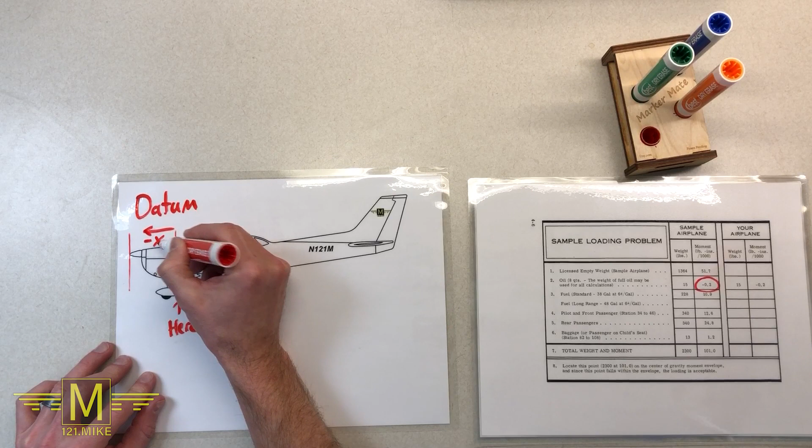But why is the 120 negative? Because that weight is in front of the point we're measuring from. As long as we're consistent where we measure from, we're fine. The distances and moments will all be given in your airplane manual, so it's not like you have to get out there with a tape measure and measure all the distances on your own.

Now we add up all the weights of 50, 10, and 90 to get 150 pounds. We divide 3,180 by 150 to get 21.2 inches, and that's where the center of all this stuff is concentrated. See, I told you it wasn't that hard.

Okay, now let's use some realistic numbers. Try to do this along with me, and hit pause if you need more time to run the numbers on your own before I show you the answer.

So we have an airplane empty weight of 1397, at 37.35 inches. We've got 35 gallons, at 6 pounds per gallon, and the fuel's at 47.8. The front seaters are 340 pounds total at 37.1. The back seat passengers are 340 pounds as well, located at 72.9. And we've got 13 pounds of luggage at 92.3.

Now our goal is to find out what the CG is and then determine if this was within the safe range. Here's a few things you'll notice in this example, though.

You see that the weights of the people are 340 pounds front and back. The FAA and commercial airlines assume that the average weight of a person is 170 pounds, which probably isn't true anymore. This airplane holds 4 people, so for this example we're just using the FAA average weight. You, of course, shouldn't do this for small planes because they are much more sensitive to differences in weights than the airliners are. You really must weigh everything you intend to put on the plane.

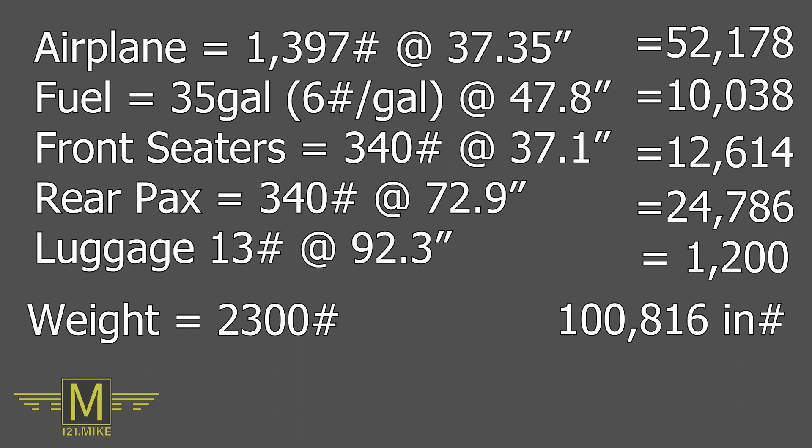So it's 100,816 over 2,300, and that gets us 43.8 inches. And at a weight of 2,300 pounds, the allowable CG range is 38.47 to 47.39. So we're okay. We're in the back half, but we're okay.

From a stability standpoint, it's always safer to be front heavy than tail heavy, though. But how do you know what the range is for a particular weight and such? Or are you saying, I'm more of a visual learner?

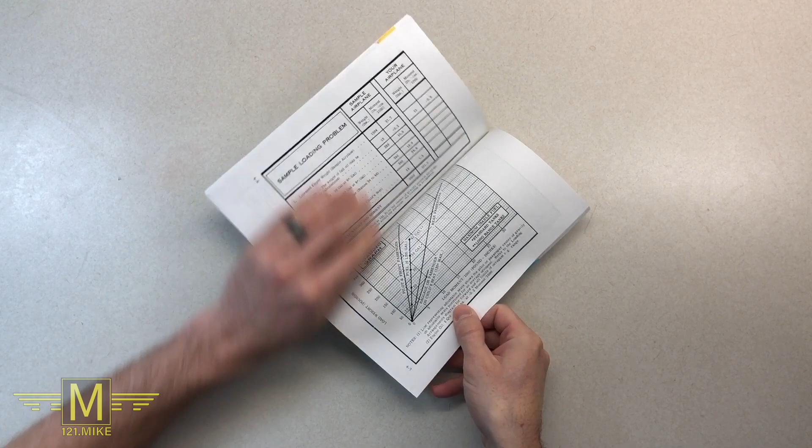Well, guess what? Inside your flight manual, you're going to find a performance section. It's going to include weight and balance. You'll see some charts that look like this, some tables maybe, charts that look like this. Let's show you how to actually use these things, shall we?

Okay, so when you load a plane, you're going to have some stuff up here, say the pilot and the front passenger. Up in the wings here, you're going to have some fuel, that's got a weight. Here you'll have rear passengers. You may have some baggage back here. And you may have to account for some oil and stuff up here. And then of course you've got the plane, I'll make that a double arrow because it's the heaviest load. So all these things have to balance. Well, that's what calculating the weight and balance will allow you to do.

So let me show you how you actually do that to figure out where in here your CG actually is.

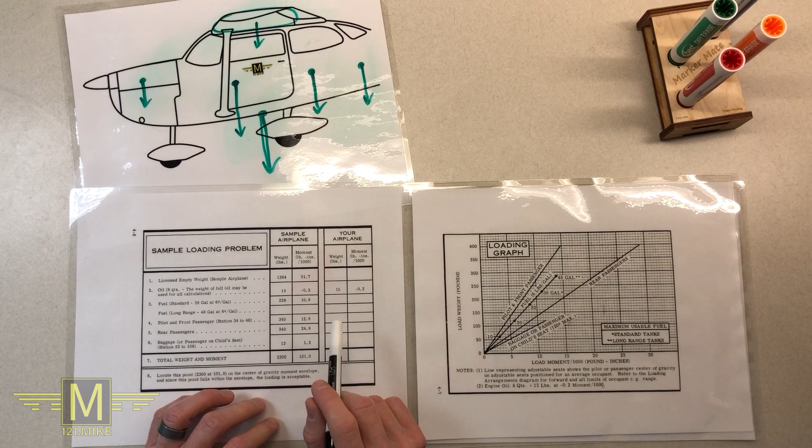So they've got a sample worked out here for you. This one is a little bit different than, say, you might find in a Piper. This one actually deals in moments. You don't calculate the moment, the graph will do that for you. Let me show you what I mean.

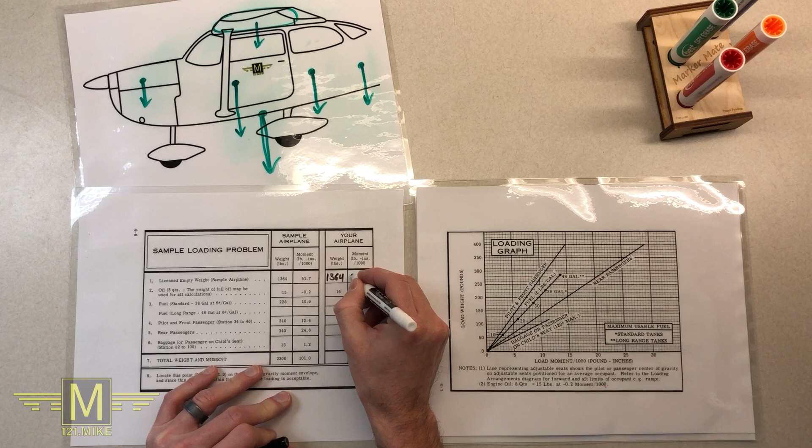So we're going to run through our weights and our moments here on this little table. Let me show you how to do this. The empty weight of the plane for this isn't going to change for the example. The empty weight is always going to be 1364, which means our moment's going to be 51.7. They've already done the oil for us because this chart doesn't have any way to do negative distances.

Fuel, standard fuel. We always want to take off with full tanks, like I mentioned, so that's still going to be 228 pounds at 10.9. Okay, we don't have any long-range tanks.

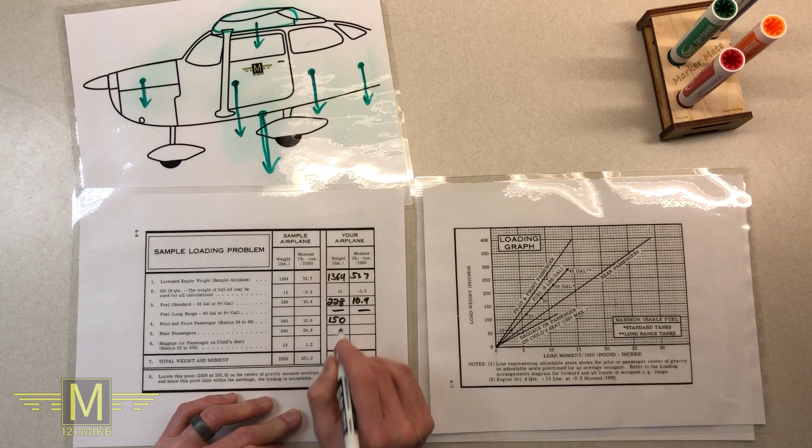Pilot and front passenger, this is going to be a little different. So let's say in the front seat we've only got a 150-pound person. Now we need to find his moment. We don't have the distances listed for us, so we're not going to calculate the moments. We're going to use this loading graph to find the moment. This is pretty simple. There's a different line for each of the positions on this plane.

For the pilot and front passenger position, it's this line here. For the fuel, it's this line. And you see the further back you go, the shallower the line gets. And this line is going to do the math for you.

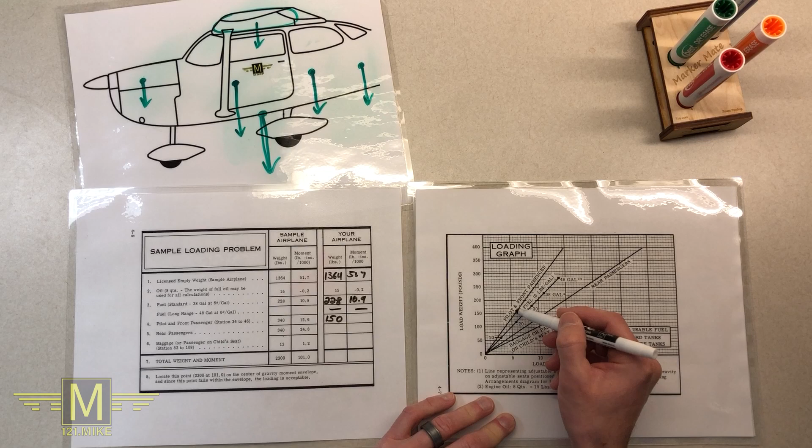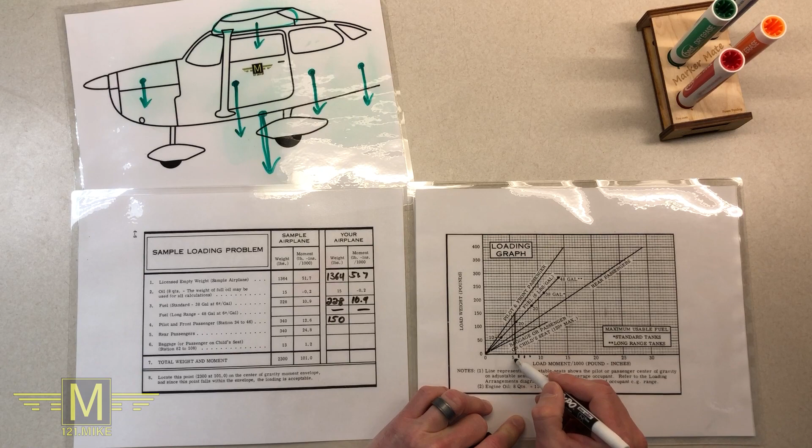So we're going to go up the front pilot and passenger line here, and when we intersect our load that we put at that spot of 150, we're going to come up, we're going to hit 150, and we're going to come down. We got to figure out what the scale is on this. There's a whole bunch of little hatch marks here. See? So these are in 0.5 increments. So that means our moment for this is 5.5, or 5,500 inch-pounds. But you can see here that this is in moments over 1,000, so we're just 5.5 to keep everything consistent.

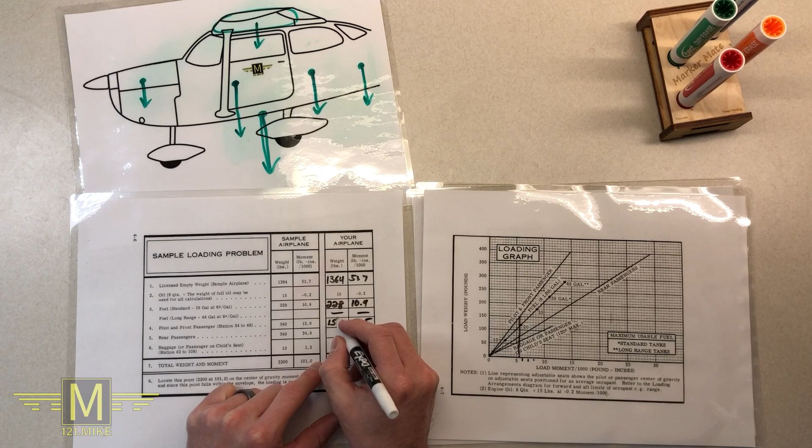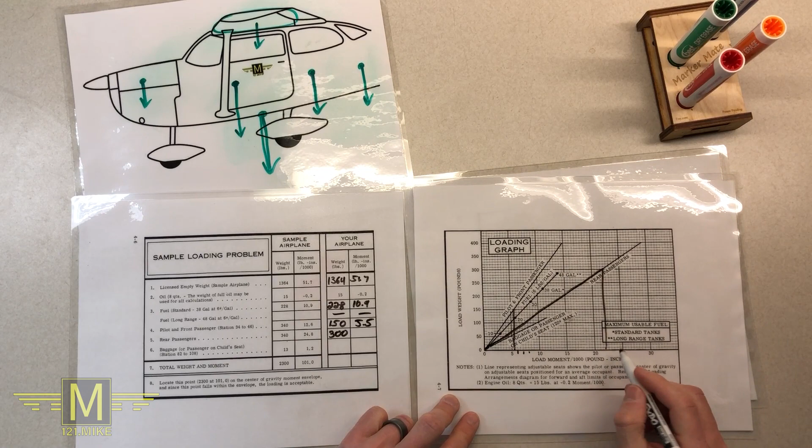Okay, rear passengers, let's put a little more load back there. Let's say we've got 300 pounds back there. So we'll do the similar thing. We'll pick the rear passengers line here, and we're going to go up the line like this until we intersect the 300-pound line, which is right there. When we get to there, we're going to come straight down and read our moment off the bottom of this graph here. So that would be 21, 20, right at 22.

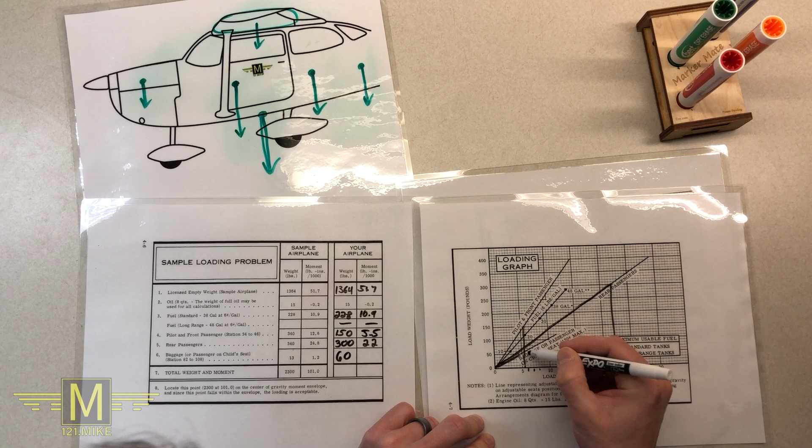22. And then baggage, you can put up to 120 pounds of baggage in the back. We don't need that much today, let's put 60 pounds in. So we'll take the baggage line, we'll go up till we hit 60, which is right there. These are in 10 increments. And drop straight down, and that gives us a 6.

So we're going to add up all these, and we're going to add up all these, and then we're going to divide the two. 2117. Okay, we're going to add up our moments. 51.7 plus -0.2, because everything is measured, in our case, probably from the firewall. And so this is a negative number because it's a negative distance. Negative x is forward of your datum, positive x is all aft of your datum. So that's why that's negative. So I get 95.9.

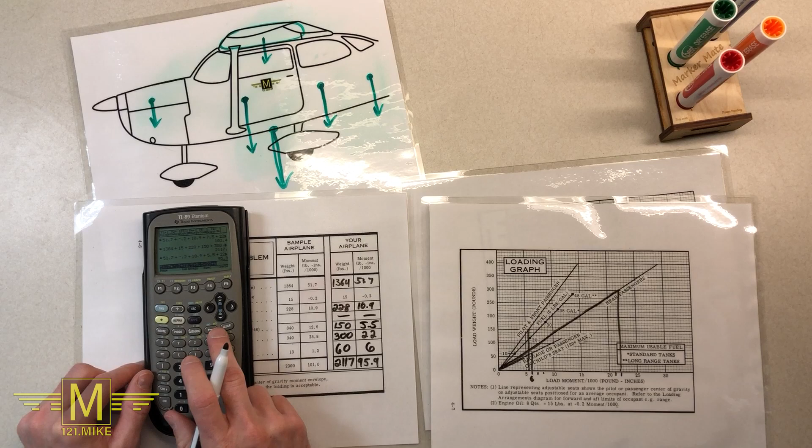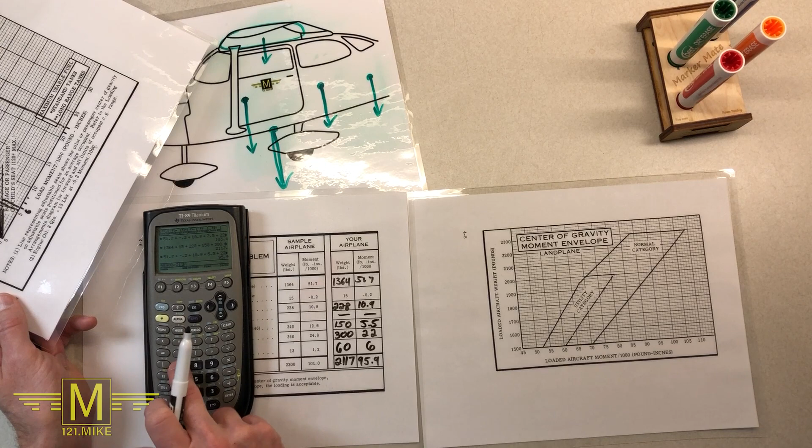Okay, and so we can now use this to find out where our CG is located. I mean, we can divide this, of course, real quick. Let me show you here. This is in inch-pounds over 1,000, so it's 95,900. So if we take this, 95,900, divided by our total weight, 2117, that's going to get us 45.3 inches.

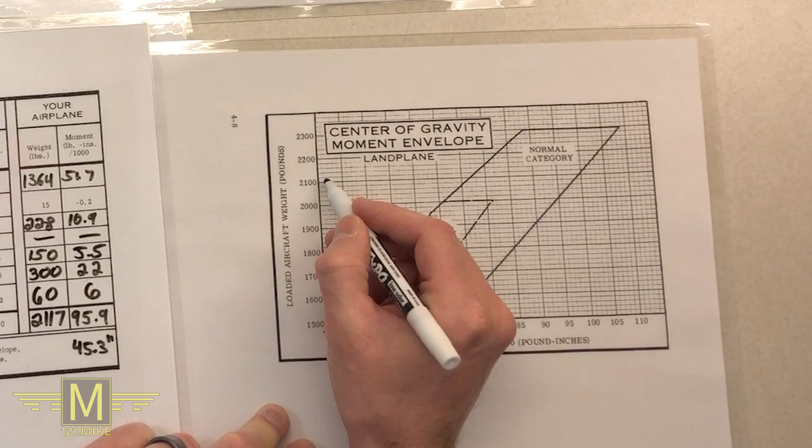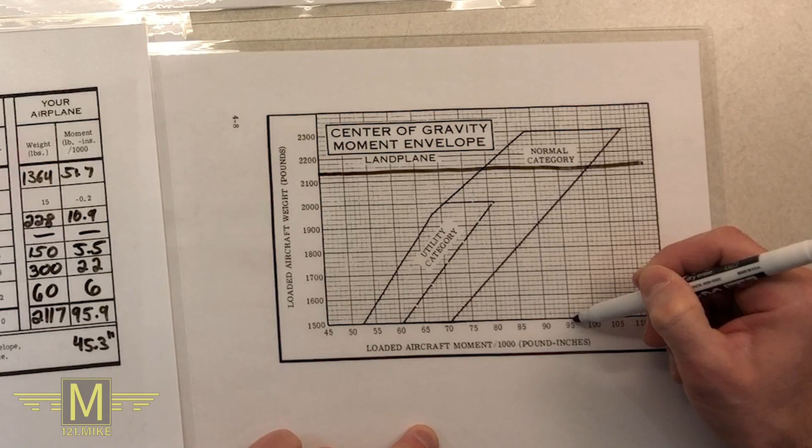So we're going to go here. We're going to go to our weight line, 2117, so we're going to call it 2120. So we're on this line here. We're going to come across, and I'm just going to draw a whole line all the way across. And now we find our moment that was at the bottom, 95.9. We're going to call that 96. So we're going to get 96 and come up. Right there.

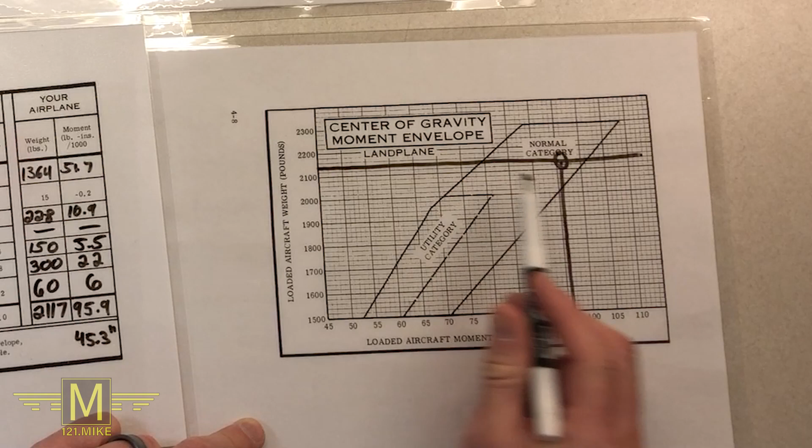So we are okay, and we know our CG is actually at 45.3. But it's really irrelevant because on this graph here, it's just showing us here's our moments, here's our weights. Where these two intersect, is it within this zone? We are in the normal category, so no limited aerobatics or anything. We have to fly like normal people today, the whole way. But we are okay because we are in this zone.

Hopefully that makes sense. Let's do another one. For our second example, we'll do this one more time so you can get used to doing it.

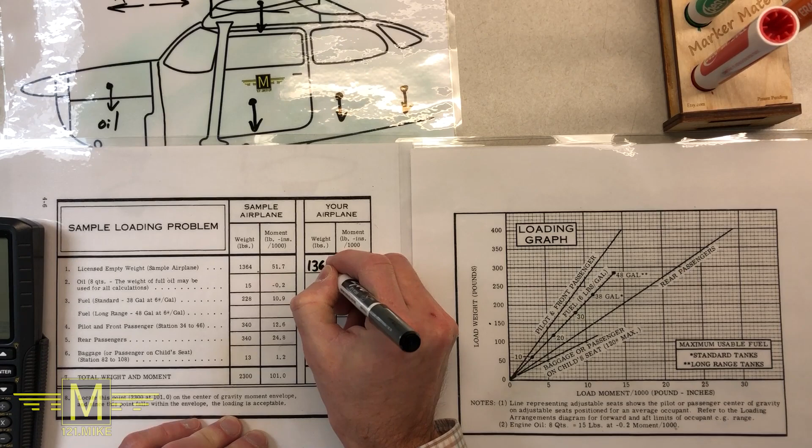The empty weight of our plane's not going to change, so that's still 1364, and of course our moment's not going to change. We're still going to use full oil.

Fuel, our tanks aren't quite full this time. I checked and it looks like we've only got about 20 gallons or so, but this is a short flight, so we're going to be okay.

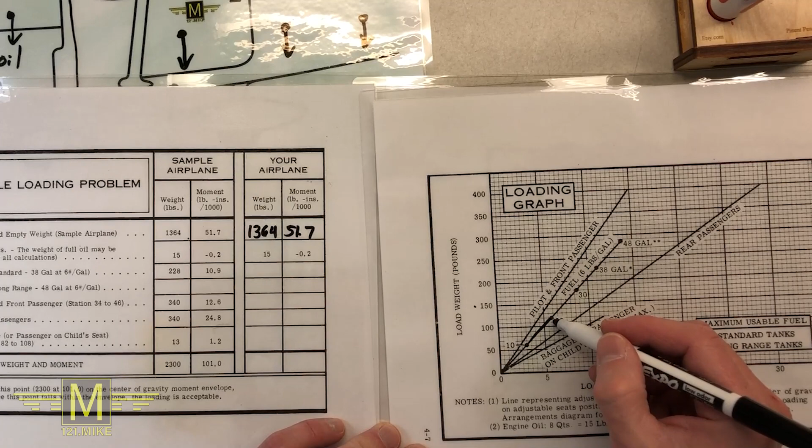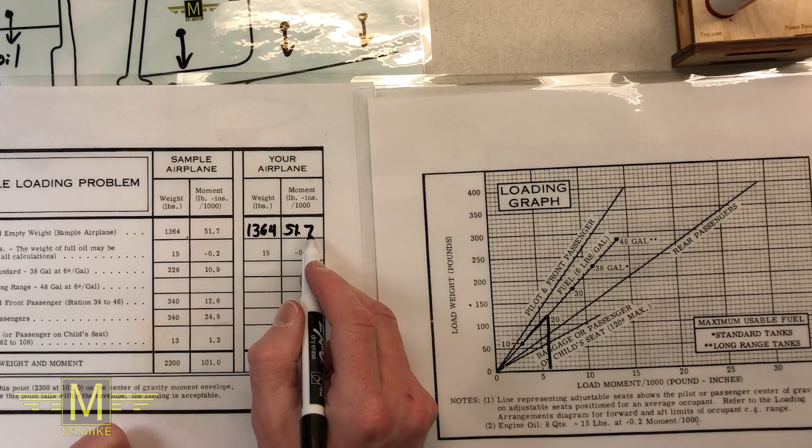To calculate this one, we're going to go up this line here, the fuel line, up to the 20-gallon mark, and drop it down. It looks to be just less than 6. We'll call that 5.75, to the nearest tenth is okay. That's 120 pounds, at 5.7.

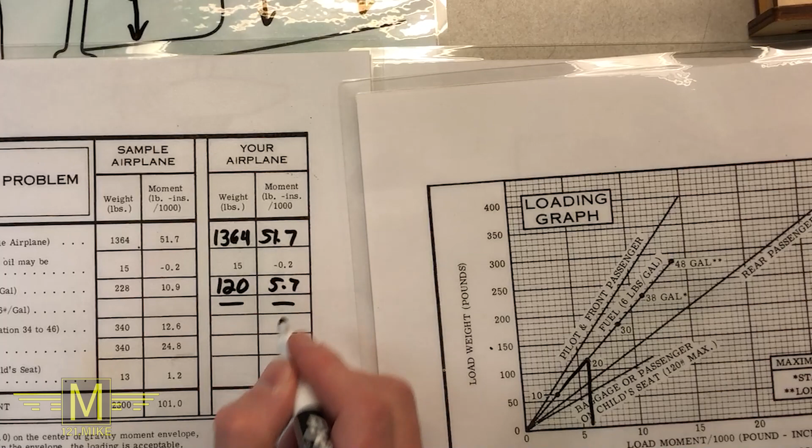Long-range tanks, obviously we can't be using those. We don't have our regular tanks full. So now for the pilot and front passenger, this one's a little bit different because this line is all calculated for the average.

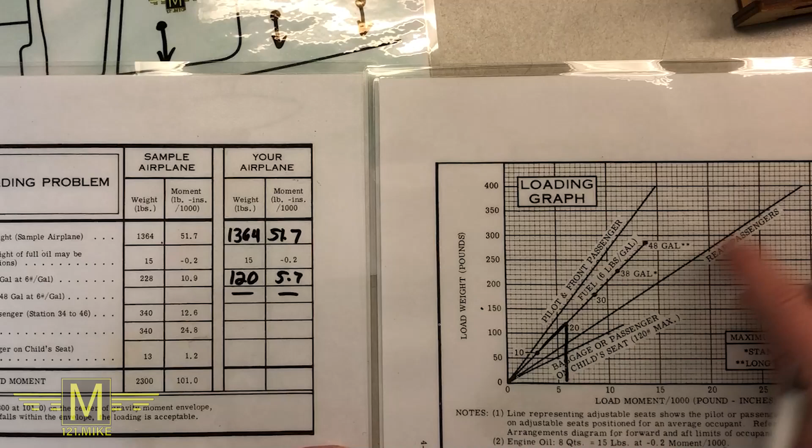You notice here it says station 34 to 46. Well, that's because the front seats are adjustable, and where you place them will of course affect your weight and balance. Let me show you here.

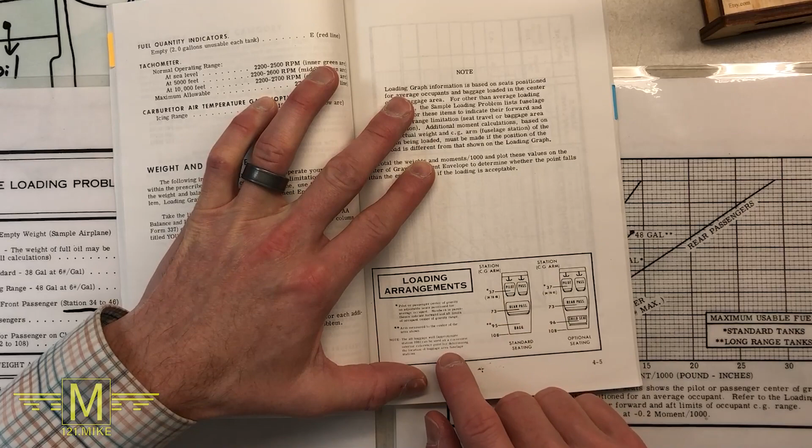Back in the performance section of the manual, you can see here it says loading arrangements. Pilot and front passenger, 34 to 46. And so this here is not really useful if you're going to use anything other than 37, right?

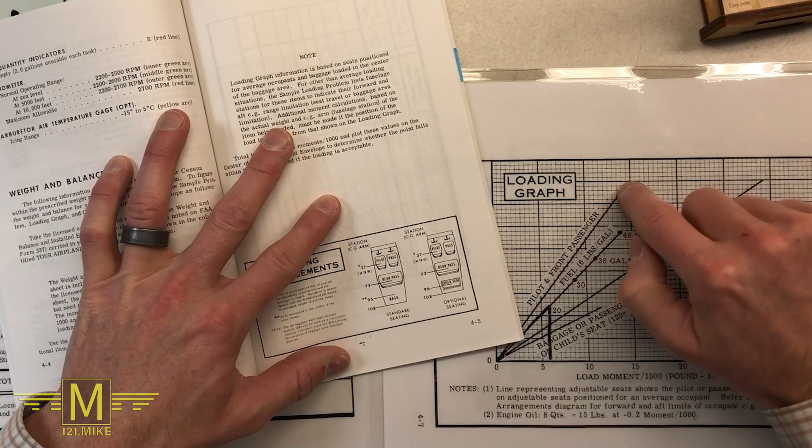So you've still got 3 notches ahead, and 9 notches behind this average 37, where this graph is calculated from. So if your seats are all the way back because you're really tall, or all the way forward because you're really short, you really can't use this line to calculate your front moment with a lot of accuracy.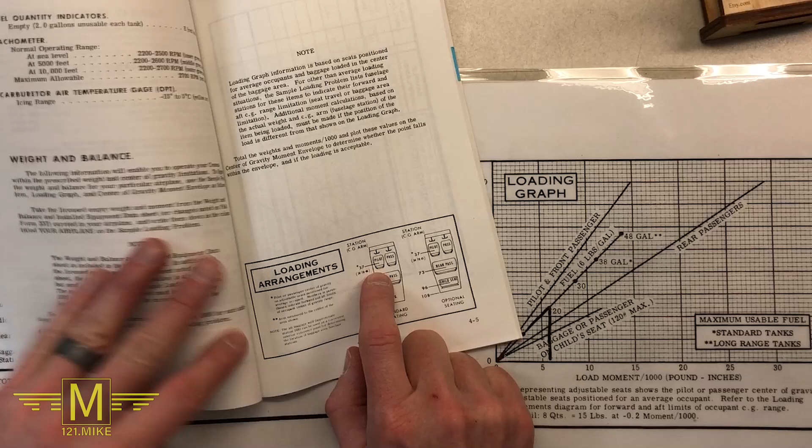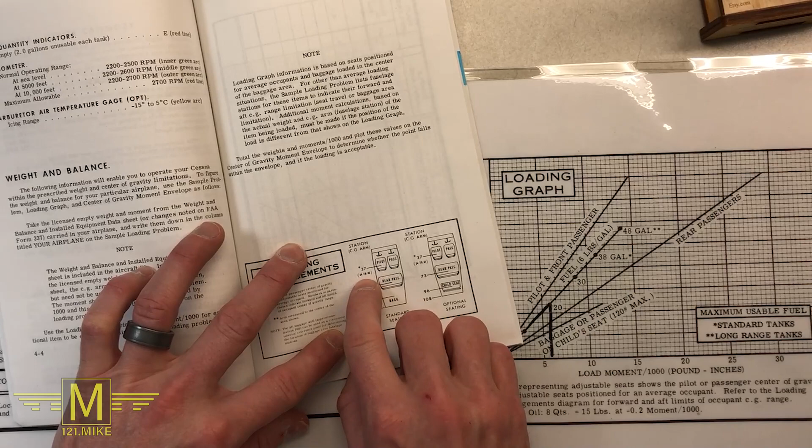So let's do this. Let's say our seats are all the way forward. And of course, the seats operate independently, don't they? So you may have to average those out. But I just wanted to let you know that this for the pilot and front passenger with adjustable seats doesn't always apply. So let's calculate it with 34.

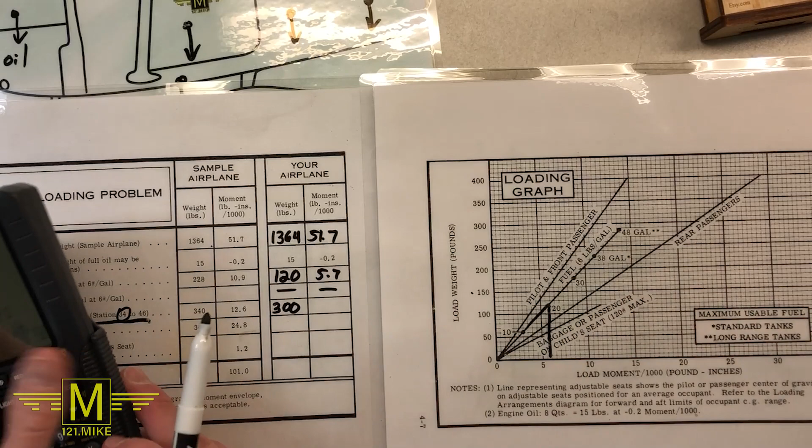Let's say we've got 150-pound people, so we've got 300 pounds up front, but it's at 34. We're going to do that at 34. So we can't use this loading graph, but this is easy to do, right? A moment is a force times the distance.

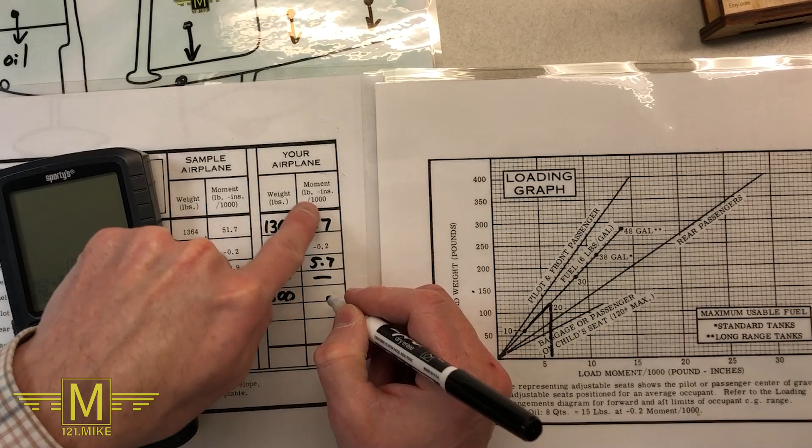Let's clear that. 300 times 34 is 10,200. But remember, all these numbers are to the thousandth, so it's just 10.2. Makes it a lot easier. We don't have to write down a bunch of zeros.

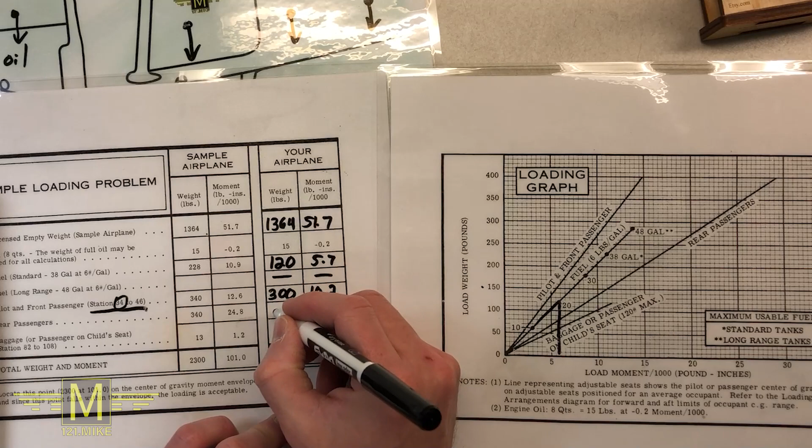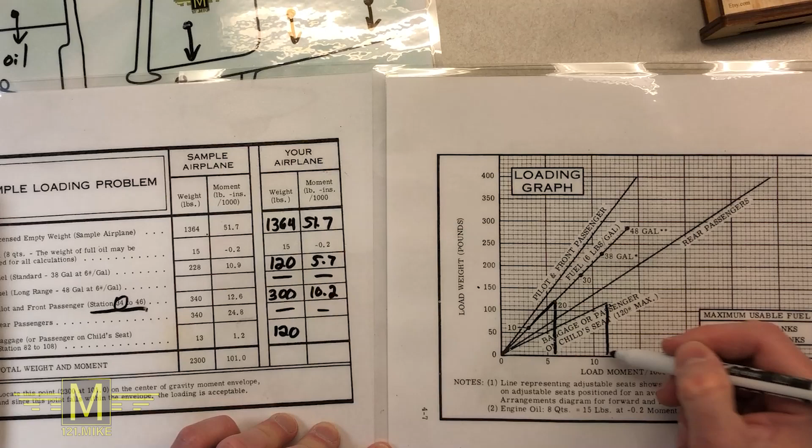Rear passengers, those seats don't move, so we're okay there. Let's say we don't have anybody going there, but we are taking a whole bunch of baggage. So we're going to max that out at 120, and it's the same as it was last time, but I don't remember what it was necessarily, 11.5. Okay, so same as before.

We're going to total up all of our weights and all of our moments. 1919. 78.9. And so now to find our CG, remember it's the sum of the moments over the sum of the masses. But remember this moment has been divided by 1,000, so it's 78,900 divided by 1919, which is 41.1 inches.

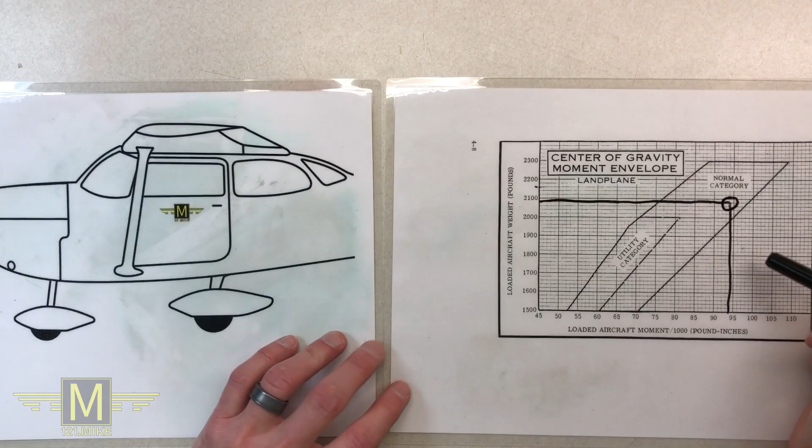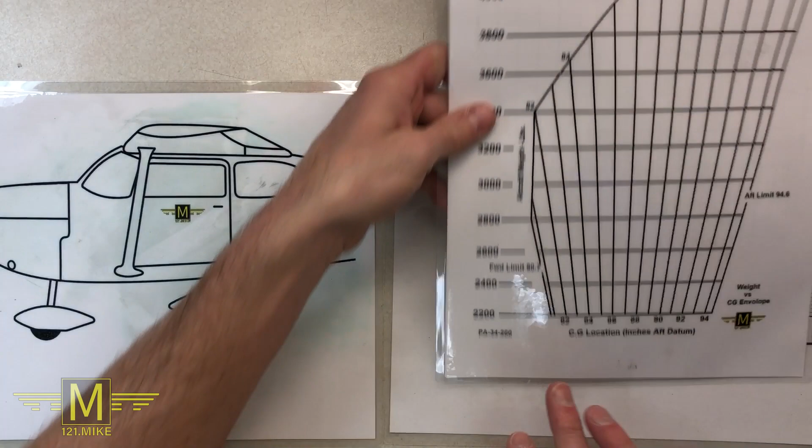Now, a lot of the times when you're doing your weight and balance, you're not going to see a chart that looks like this with moments across the bottom. You're going to see a chart more like this that has the CG location across the bottom. It's just a different way to present it, and this is probably more common with the CG. If you do it that way, it's really simple. Let me show you here how we do that.

You already know how to do that, right? It's the sum of the moments over the sum of the weights. In our case, for this problem, the moment is 94, but it's times 1,000. So we're 94,000 divided by our weight, which is 2,080 pounds. I'll write that. So it's 94,000 over 2,080 pounds.

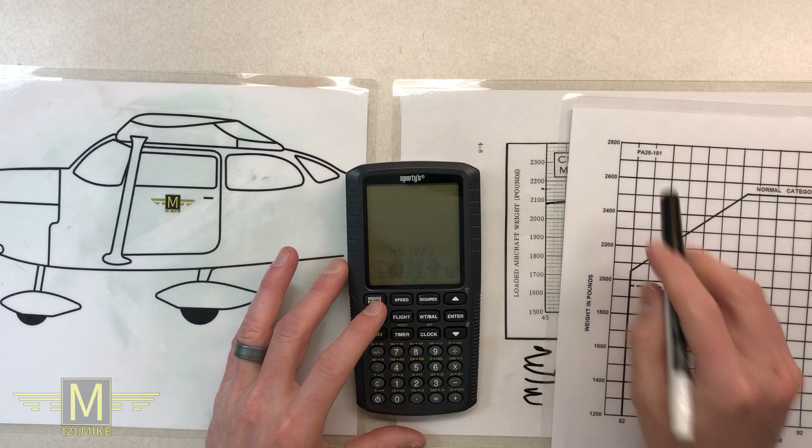If we go over to one for a Piper Archer, the PA 28181, you'll see here that we can't just translate it, it's a different airplane. These numbers are much, much bigger.

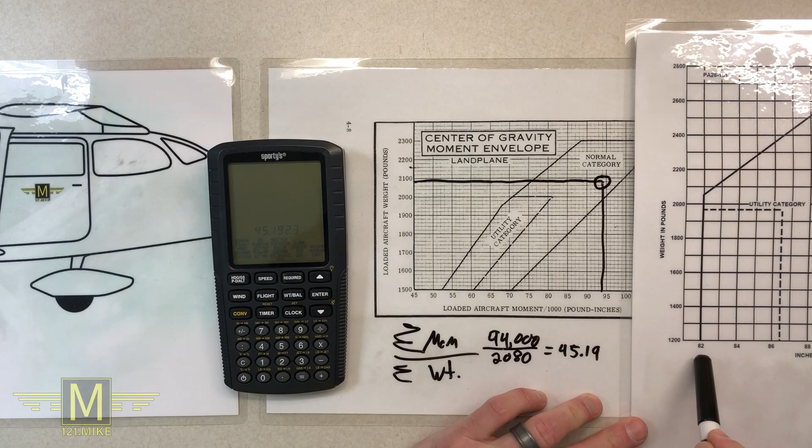Look, 45 is not even on our chart. You may wonder, why is that? Why isn't that on it? Well, because they're simply measuring from a different spot.

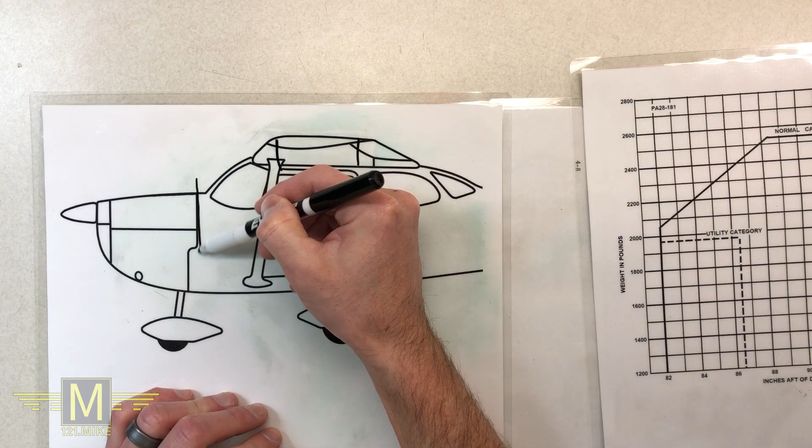Of course, in pretty much all planes, the CG is going to be somewhere here within the wings. In the Cessna's case, they're measuring from somewhere around here, but for this Piper chart, they're measuring out in here, or maybe right there. I'm not sure exactly where they're measuring for this particular plane, but they're measuring much farther forward.

Obviously, if you're measuring from a distance farther forward, your CG number here is going to be much larger, because it's a bigger distance. And so that's how you would do that.

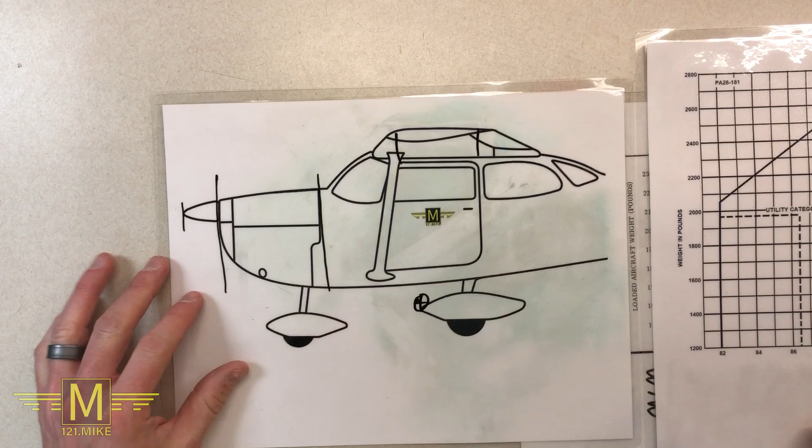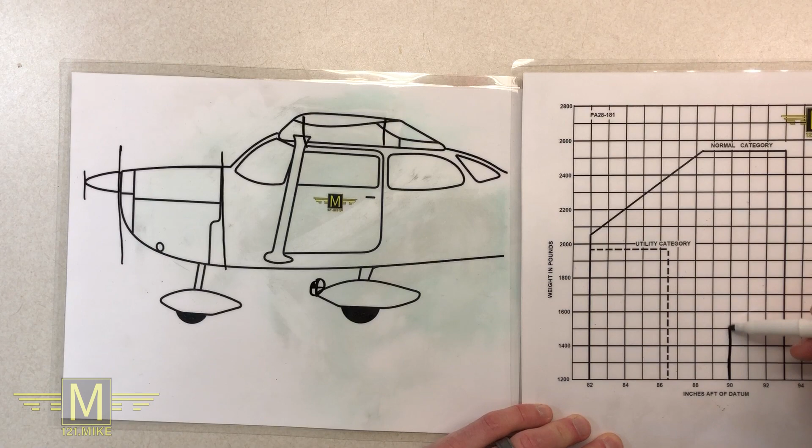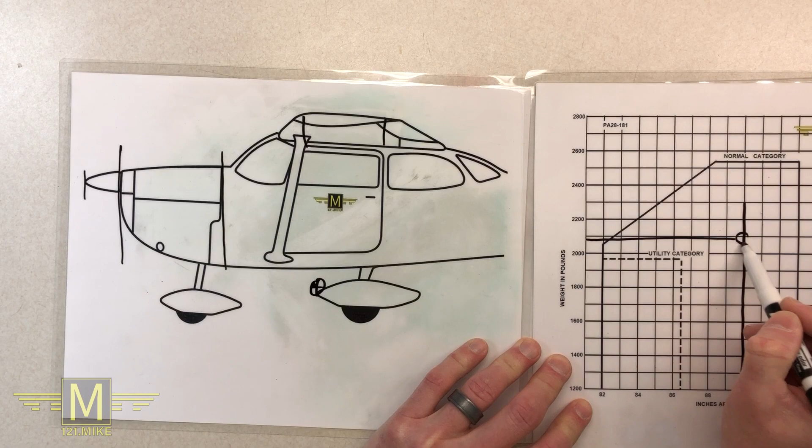Once you find your CG, let's just say it's 90 in this case - we'll double that number just for examples. You'll go up to your 90 wherever, and we can still use our same weight of 2080. This is 2,000, 2,100, so 2080 would be right about there. So for this Piper Archer, we'd be right there.

This one here is for a PA 34200. This is a twin engine, but it's the same thing. You find your CG first, down here, and then your weight up here, and you intersect. This one has a slight fan shape to it, but you run it the exact same way.

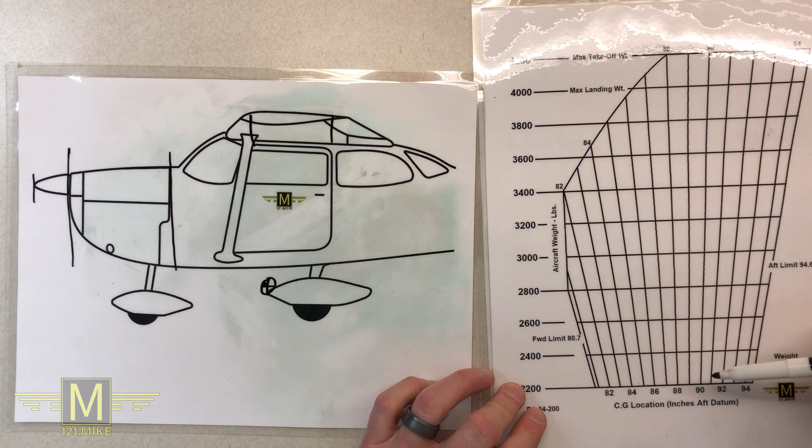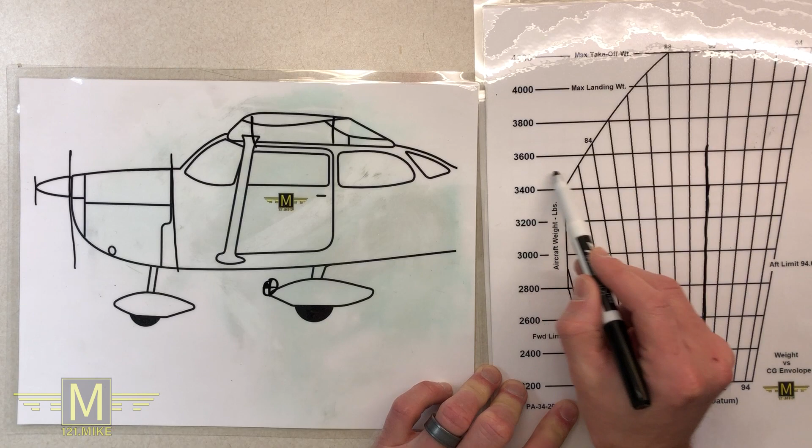We can do it as well. So we'll just pretend that 90 is our line here, and let's say for our loading purposes we loaded at 3,500 pounds. We would interpolate here, come across, and we'd be right there. So even though the charts for this look different and they're not done in moments, it's the exact same procedure.

You just need to add the one extra step of actually finding your CG by dividing your moments by your weight. Okay, let's do a scenario here that you might see on a test.

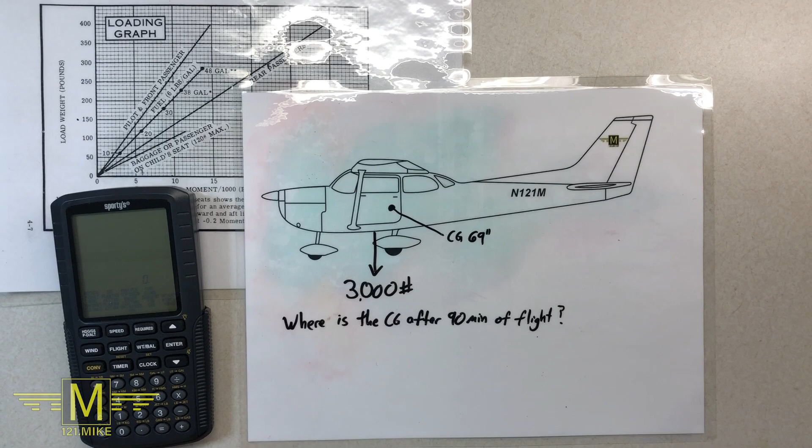Let's say the plane weighs 3,000 pounds and its CG is at 69 inches. Where is the CG going to be after 90 minutes of flight? The fuel station is at 64, and you burn 9 gallons per hour.

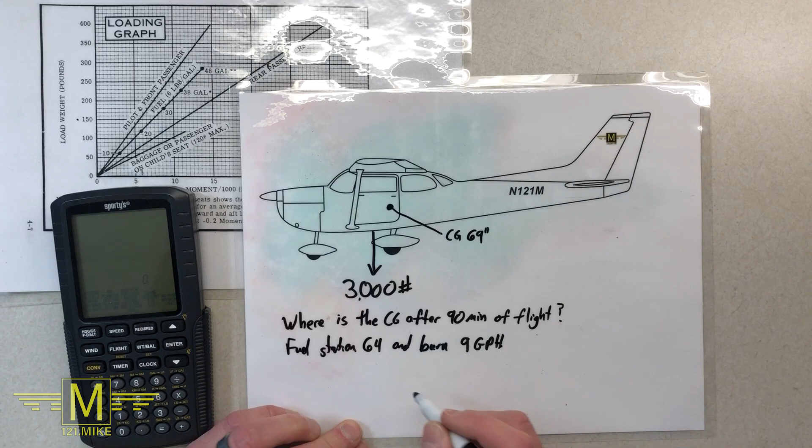You may wonder how in the world you're going to find this. Well, I'm going to show you the simple math way to do this, rather than just guessing and checking answers on your test. So let's calculate our total moment, right?

So moment right now is 3,000 times 69. 3,000 times 69 is 207K. All right. Now, we know that we're burning 9 gallons an hour.

We know where the fuel is located, so we can calculate the weight of this, right? The weight of this fuel is 9 times 6, isn't it? Which is 54. That's 54 pounds.

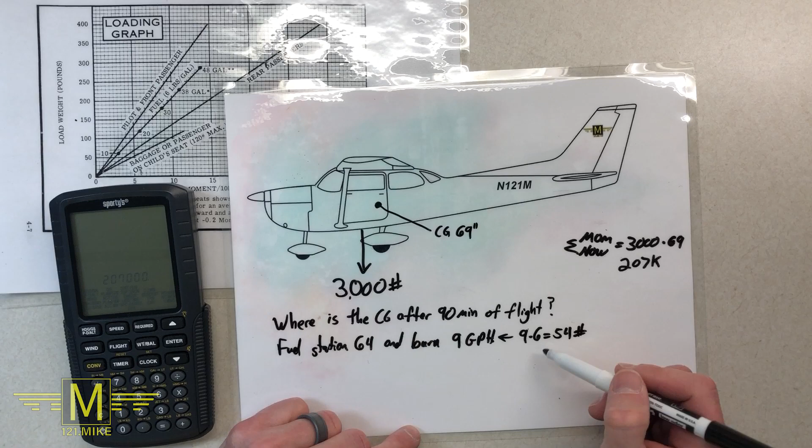But it's 90 minutes, okay? So it's going to be 50% more than that, because that's an hour and a half. 54 times 1.5. Our total burn is 81 pounds.

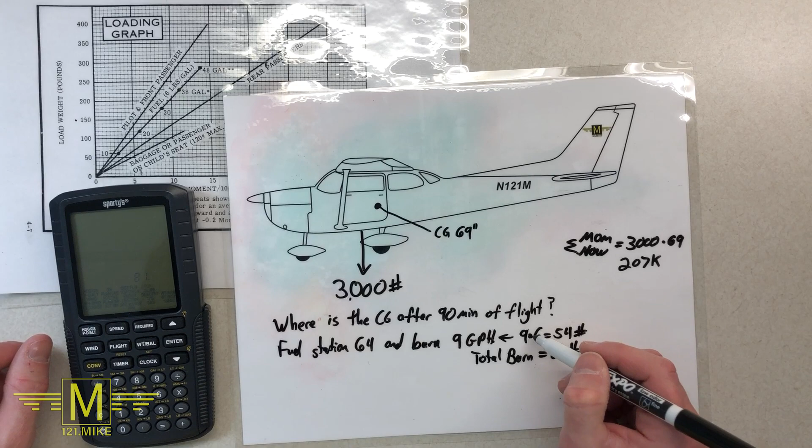So that looks like 9.6 - I should use the X. And we know that this is at 64, isn't it? So the moment created by the fuel is this: it's 81 times 64.

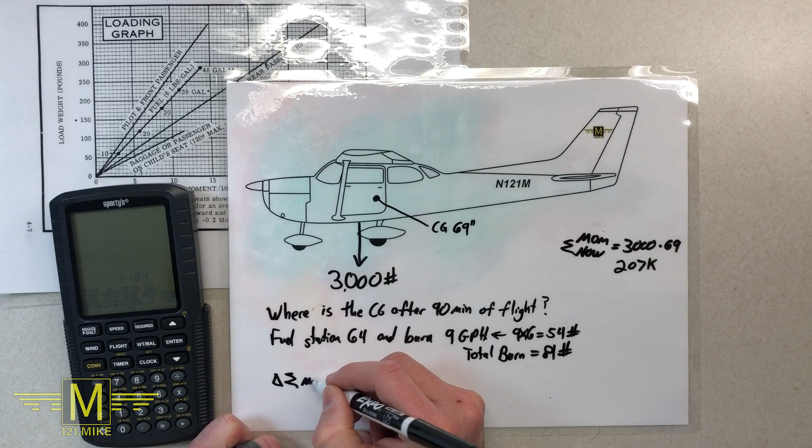We're going to get a delta moment - it's not a sum of the moments this time, it's a delta moment: 5,184.

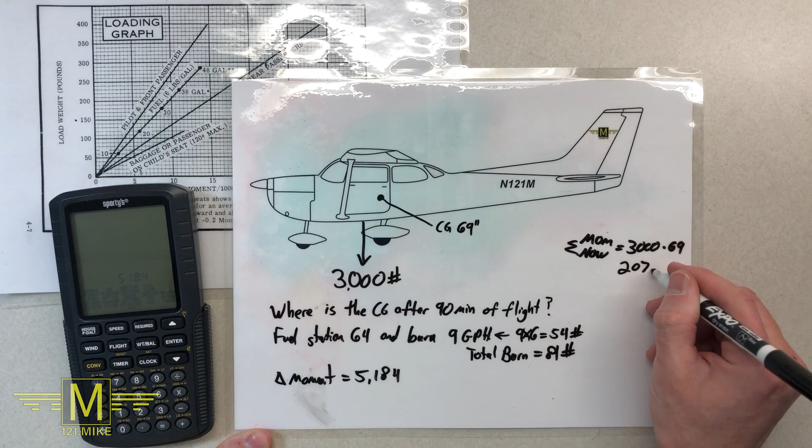Okay, so our moment is going to drop by this much. So we take 207, I'm going to add the zeros now since we'll need them, minus 5,184 equals 201,816. That's our new moment.

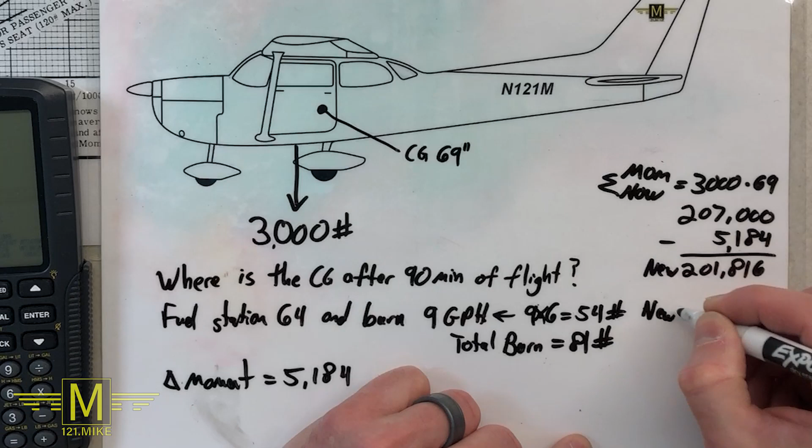New weight equals 3,000 minus our burn, right, which is 2,919. So our new CG is equal to the sum of our new moment,

201,816, divided by 2,919, equals 69.1 - we'll call it 14. And there's your answer. That's where the new CG is after an hour and a half of flight.

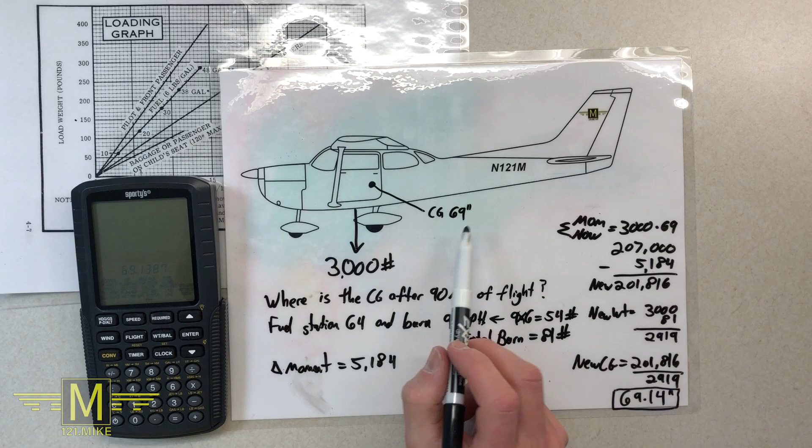Notice it was here, now it's here. Didn't move very much, did it? Just over 1/8 of an inch. And of course it didn't move much, because airplane designers are smart people, and they put the fuel near the CG of the plane.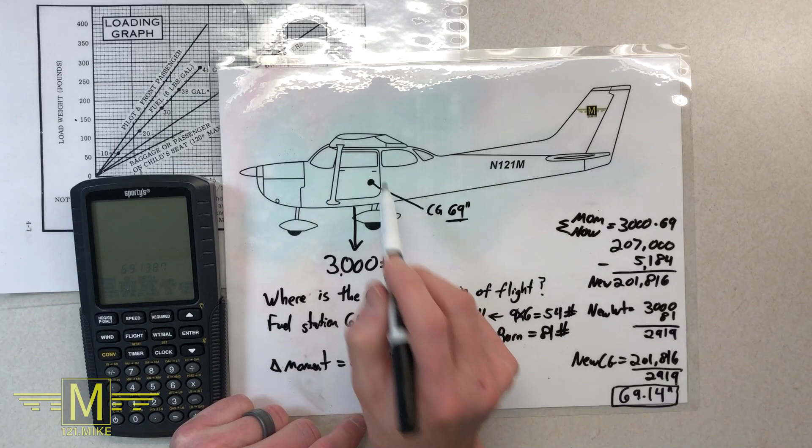Because as you burn fuel or add fuel, you certainly don't want your CG hopping all over the place. You want it to stay pretty well the same, because the fuel load is going to change drastically in flight. And so those brilliant designers locate the fuel near the CG, and the wings are a great spot for that.

Okay, I showed you how to do it here with the math. Let me show you how to do this exact same problem in the computer.

You're going to go to the weight and balance, you're going to go weight and arm, since that's what we're given - we're given CG locations rather than moments like you'd use on the Cessna's graph. So weight and arm, enter.

Our weight is 3,000, enter. The CG of our plane is 69, enter. Reference factor is 1 because we're dealing in pounds, we're not dividing anything. It gives us our moment of 207. We're going to hit enter to cycle back to the weight line.

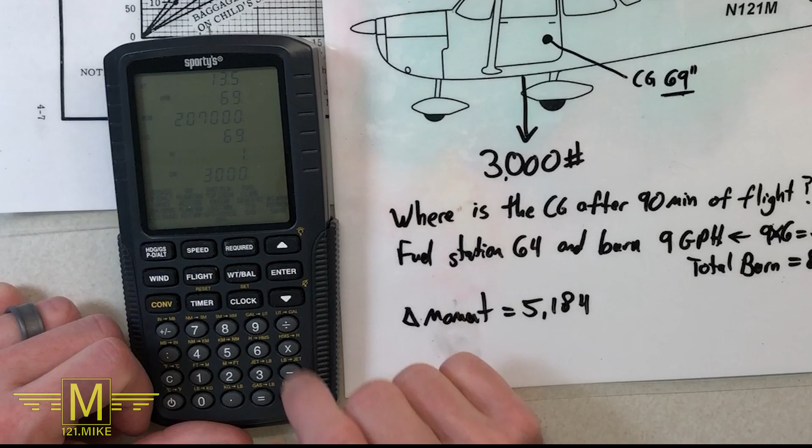We can do math here, let me show you. So we're going to burn 9 gallons times 1.5, so 9 times 1.5 equals 13.5, times 6.

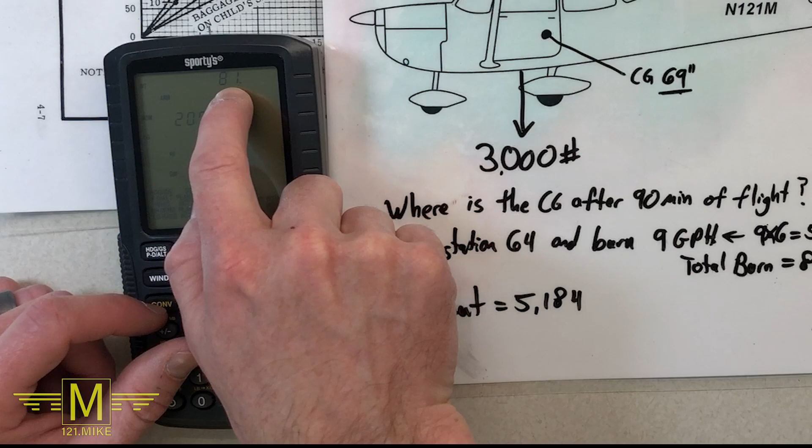81. Look at that. We didn't have to do any math on our own. You can do math on the lines, just make sure you hit equals, not enter. Once you get the thing you want on that line, we're actually going to have minus 81, aren't we?

Because we're burning that fuel, I'm going to hit the negative key. I've got negative 81. Now I can enter. The fuel was located at station 64. Enter. You can see that our gross weight dropped. And there we go.

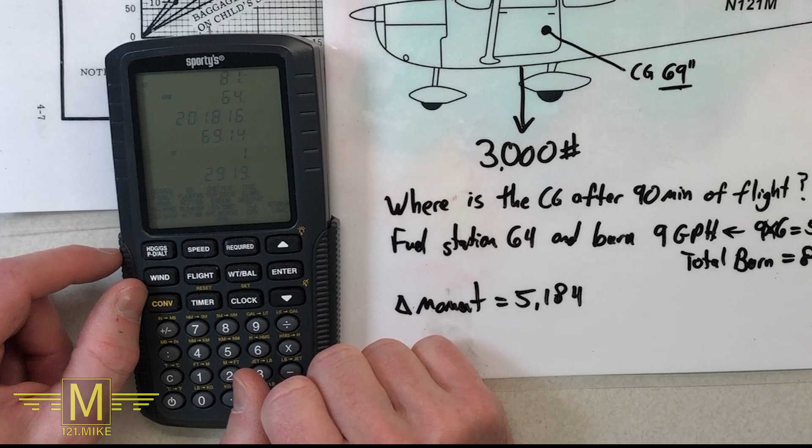That's the answer, nothing else to do. Our CG is flashing at us at 69.14. Look at that, that's exactly where we calculated it to be. So that's how you can do it in the computer.

And of course, now if you want to add more fuel when you get to your fuel stop, let's say you weren't full to begin with and you want to take on some fuel, we'll cycle back to weight. Let's add an additional, arbitrary amount of gallons. So we'll go 12 gallons times 6. Because we're not doing time this time, so we don't need the 1.5.

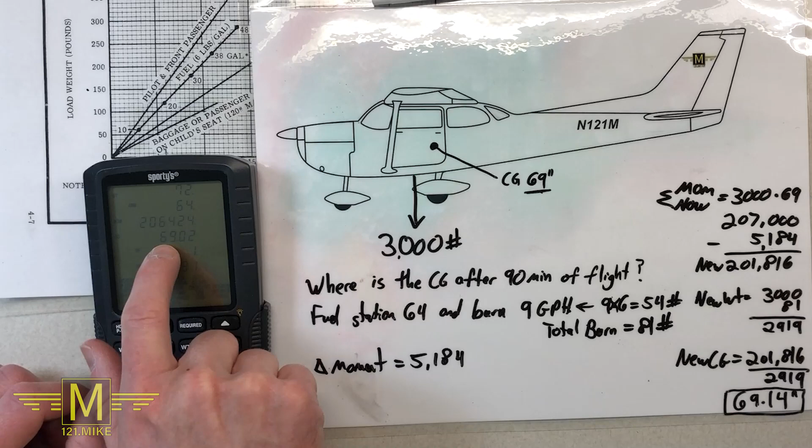So we're going to add 72 pounds at the same arm, right? Same arm as before. So we're going to hit enter. And there, our weight went up, our CG recomputed. Simple as that.

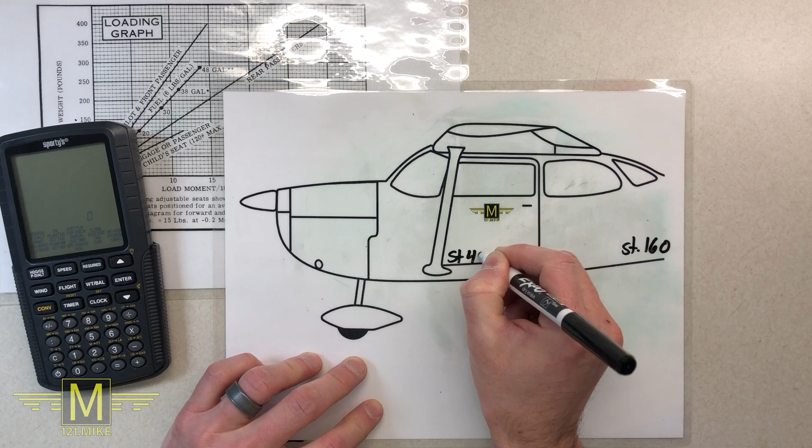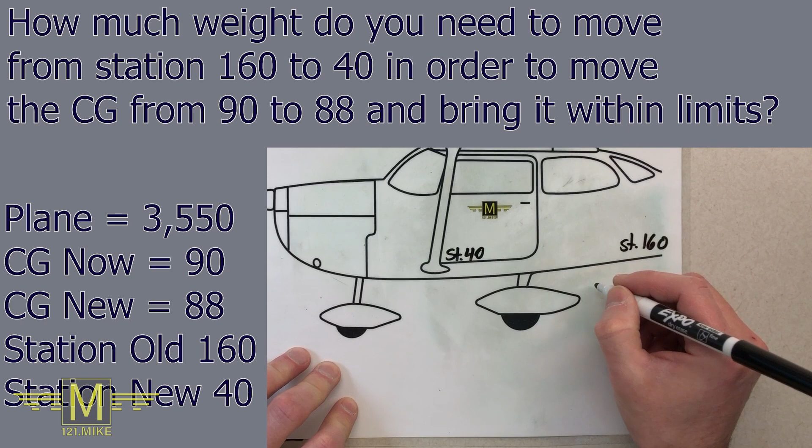Okay, let's do one more common scenario that you might see. Let's say you've got back here at station 160, and up here, let's say this is the front seat, maybe station 40. How much weight do you need to move from here to here in order to move the CG from 90 to 88 and bring it within limits? So here's our problem scenario. It's not a hard problem.

So once again, we're going to calculate our current moment. We're going to call that moment now: 3550 times 90 is 319,500. The overall total weight's not going to change, is it? We're just going to move some weight around. So that's maybe the big nugget here, the weight doesn't change.

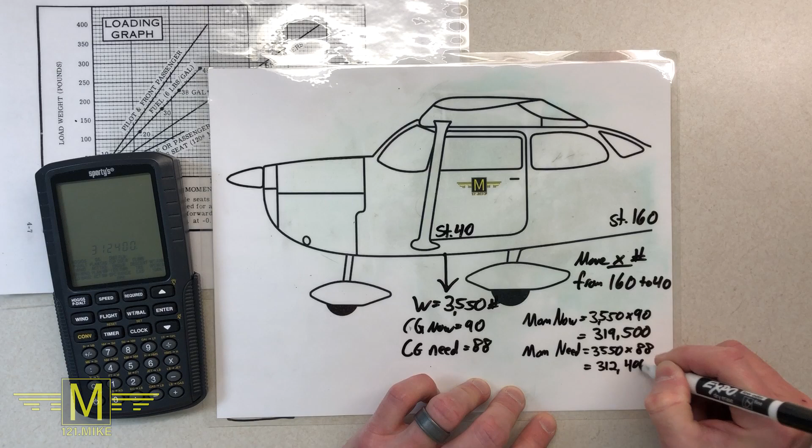But we know where our new CG is going to be, so we're going to compute that moment. 3550 times 88 is 312,400. This was our old moment, here's our new moment. The delta moment is 7,100.

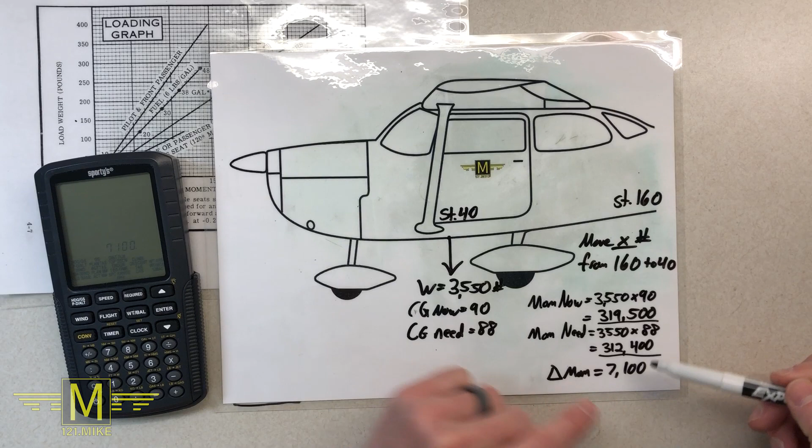My math agrees. All we can do, right, we know what the distance is, we know what our moment change is going to be. So we're simply going to divide the moment change by the change in our distance to get the amount of weight we need to move.

Okay, I'm going to do this one over here. So we're going to take 7,100 divided by 120, which equals 59.2 pounds. We need to move at least this much weight in order to get our CG within limits so that we can fly safely.

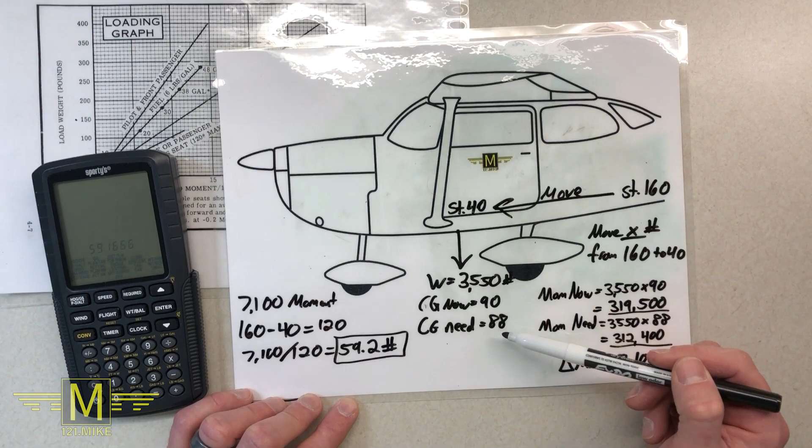So you see, that wasn't that difficult. The weight didn't change. We calculated the old moment with the old CG, the new moment, and you would pull this number maybe off a graph in the real world, right?

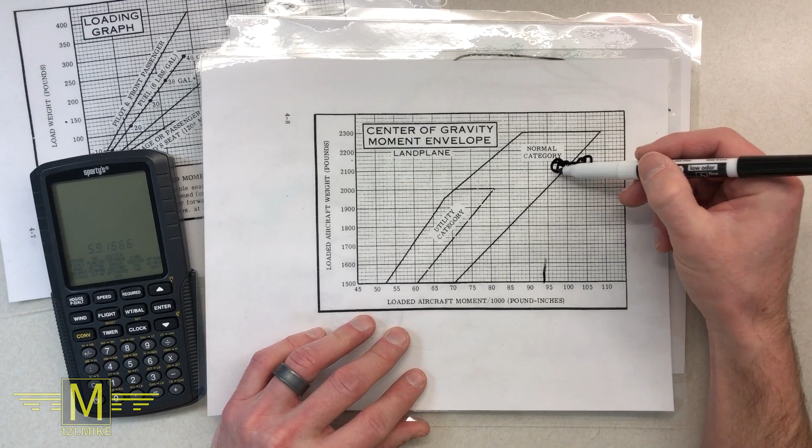So if you say your CG, you know, this chart doesn't work, but let's say your CG was here, right? You need to move it to here. You would come down and see, here's your new, and there's your old. There's your new and old moments. So you could calculate that.

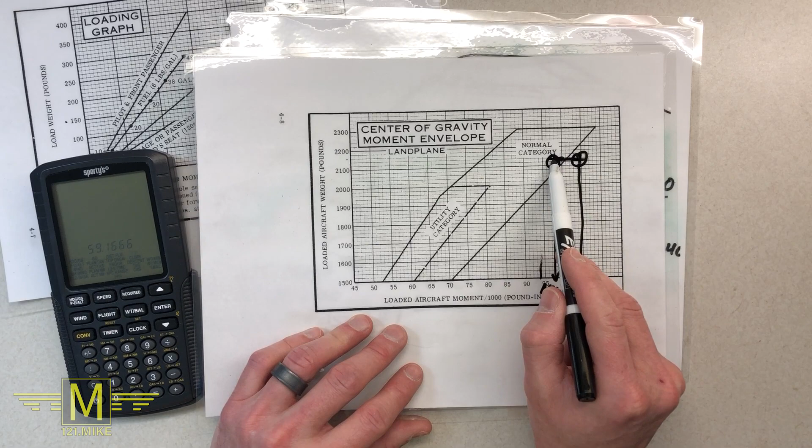So if you were loaded out here, you would know what your moment needed to change by in this case. Or of course, if you're using one of the other graphs, if you were like this and you were loaded here, you needed to move to here, right? There's your old CG, and there would be your new CG. And you know if you make that change, you're within limits.

So that's the practical application for all this math right here. I really enjoy doing weight and balance problems, and with a bit of practice, you're going to get quite good at it. So go back to some of those diagrams I showed you and maybe create some loading scenarios to practice with. I've shown you the scenarios that you will encounter in real life and on an FAA knowledge test.